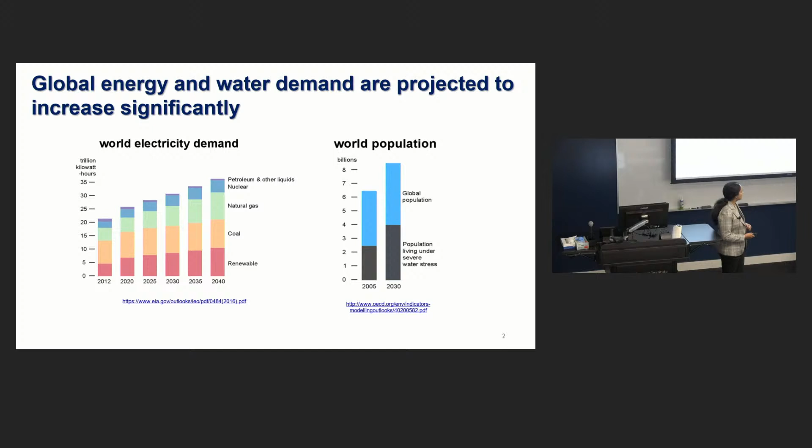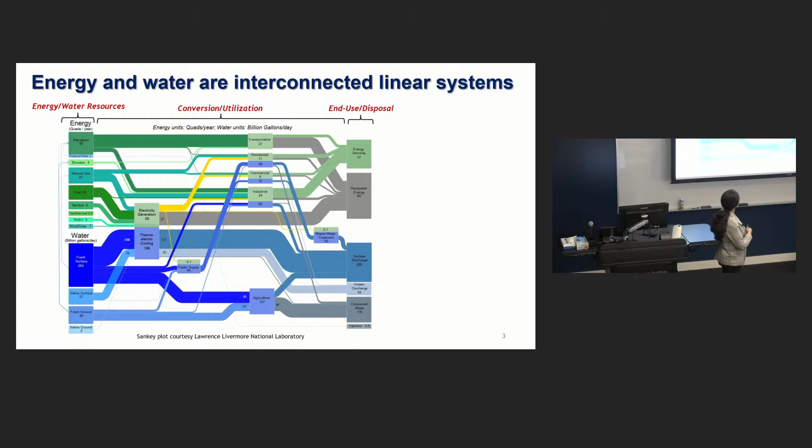And then if we look on the water side, by the end of this decade, so by 2030, we see that about half of the global population is going to be experiencing severe water stress, meaning that we are depleting our naturally occurring freshwater resources, and we really need to think of ways in order to increase our water resources. So this is a Sankey diagram that kind of shows you how water and energy are so closely related and linked. So here we have all the different, I'm gonna walk over here, with our different energy sources, most of which is used for transportation, residential or commercial buildings, as well as for industrial applications and electricity generation.

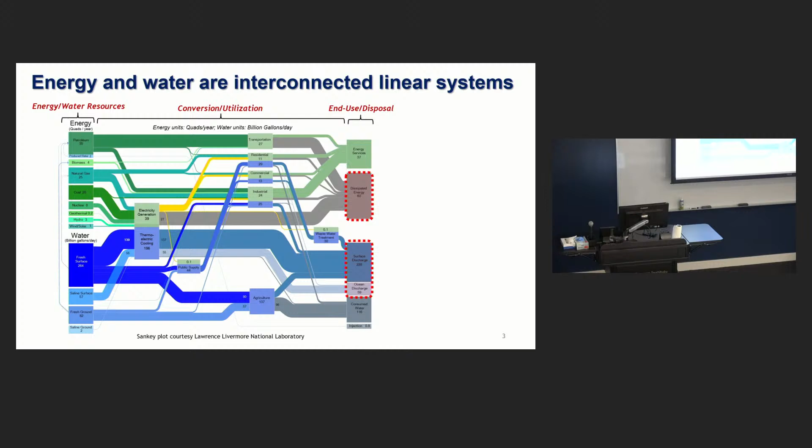And then down here we have all our water sources. So this is our fresh water that's available. And we see that a large amount of our water is used for power generation, so for cooling power plants. And then the rest of it, or a large amount, is used for agriculture. And what I want to draw your attention to, if we follow these lines after it's utilized in these different sectors, what you notice is about 60% of the energy that we started with is just dissipated as waste heat. And about 70% of the water that we started with is just discharged as contaminated water. And so we have this very linear model. And what we're interested in is thinking about ways in which we can recover and reuse both energy and water, and also thinking about ways in which we can decarbonize these energy systems.

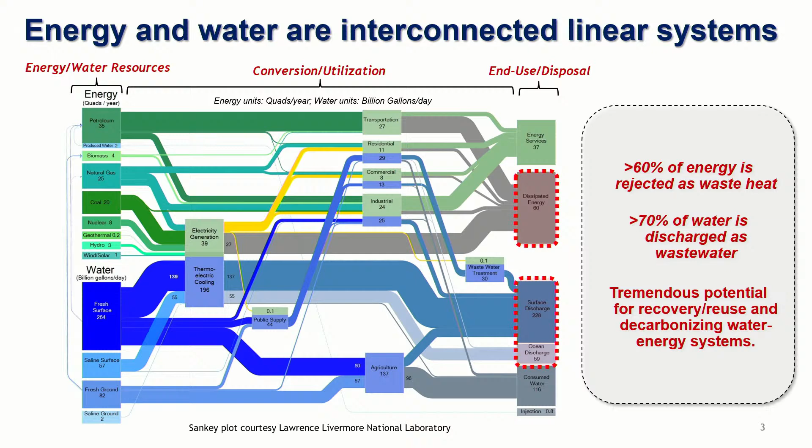And so one thing you may have come across a lot is this water-energy nexus. And all that's telling us is that water and energy are very closely coupled. So for any energy production process, whether it's extracting or refining your fuel, producing power, or cooling your power plant, you require a lot of water for those processes. And on the reverse side, if we look at extracting clean water, energy is required for that extraction, for purification, for distribution, and for wastewater treatment. And so this is really referred to as the energy and water nexus. So any technology that we develop on the energy side should not increase our water footprint, and anything that we do on the water side should not have a significant energy impact.

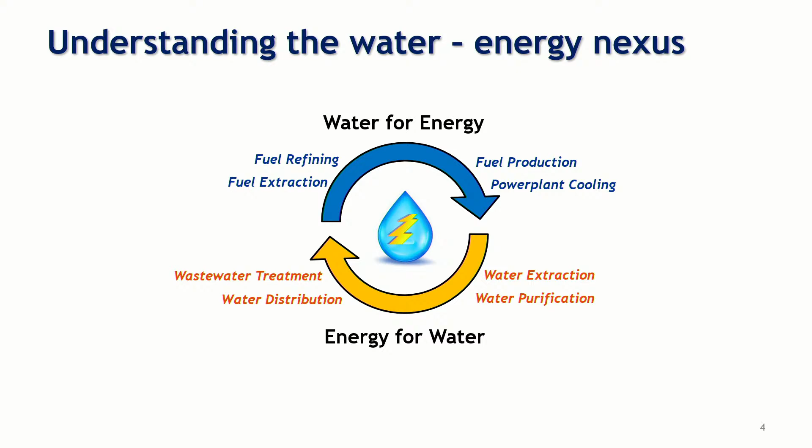And so this is where we can really think about what can materials do for us. And so my lab focuses on two different areas. So on the water side, we look at how can we harness solar energy. So that's an abundant form of energy, but it's not in a form that we could readily use. So how can we harness that solar energy for water treatment? How can we get to zero liquid discharge, where you're extracting all the water and you don't have this brine that you have to dispose?

In that process, you could recover resources. For example, there's a lot of interest now in extracting lithium from these salt brines. So how do you use materials to do that? How can we do surface modification in order to get selective extractions?

And then on the energy side, with the goal of trying to decarbonize our energy use, we're looking at how can we use thermal energy storage. And we're looking at a couple of different applications here. So thermal energy storage for buildings, where you would operate at a temperature of under 100 degrees Celsius.

And then thermal energy storage for industry, where they require temperatures of 1,000 degrees Celsius, for example, for steel manufacturing, where right now it's just fossil fuels being used. So if we really want to electrify industrial applications and buildings, we have to think about adding in thermal storage.

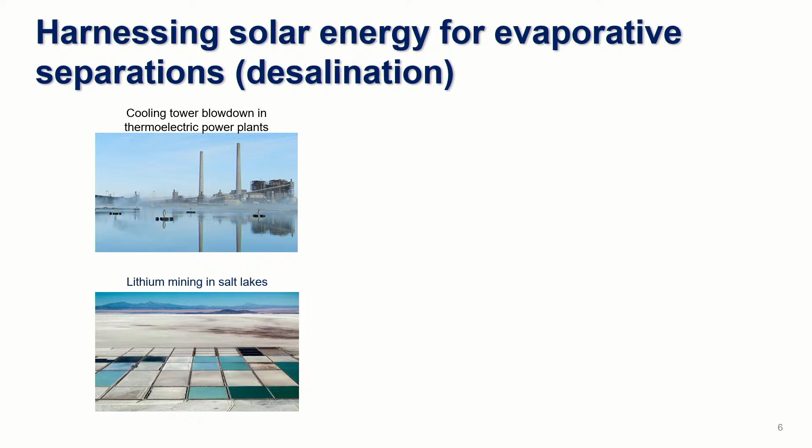You have these large evaporation ponds that are just exposed to natural sunlight, and over time that water evaporates and you're left with salts, or in this case with lithium-containing salts. Now the challenge with just doing this very passive solar evaporation is that when sunlight comes in, it is absorbed by a very large volume of water.

So water volumetrically absorbs sunlight because it's fairly transparent in the visible and the near infrared range. So as a result, your conversion from sunlight to vapor is pretty low. It's only about 20% conversion. So that is extremely low, and because of that, you either need very large land areas to do this kind of passive evaporation, and you also need significantly long times.

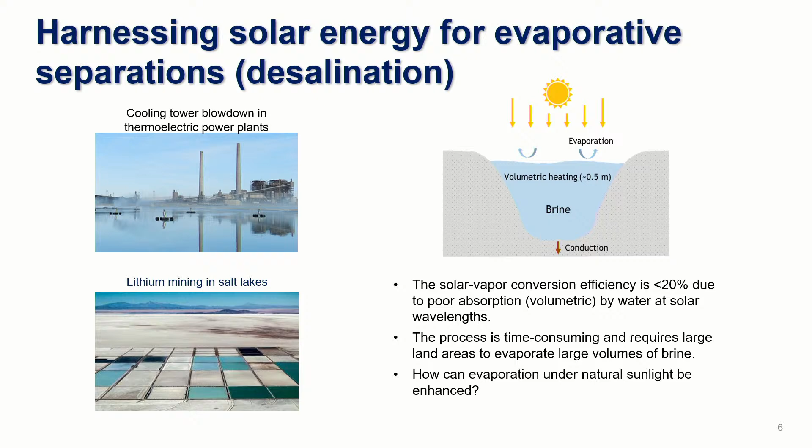So for example, for lithium mining in ponds that are about a meter deep, they have to leave those salt solutions in there for 6 months to a year in order to get all of that water to evaporate. So the question is, how can we really just enhance evaporation under natural sunlight? And again, this is where we can use materials, specifically photothermal materials.

So as the name suggests, you're converting those photons into thermal energy or heat, and you're localizing the heat at the surface, because evaporation is only a surface phenomenon. So if we can localize all the heat at the surface, we'll increase the surface temperatures, and that'll increase our evaporation rates. So what does a typical photothermal converter look like?

It comprises a solar absorber. So this is just a material with a very high solar absorptivity. And then we need some kind of insulating foam-like layer to separate that solar absorber from the bulk liquid, because we want to keep the heat at the surface. And then finally, you have a hydrophilic wick, which is just the material that's going to deliver water from the bottom to that surface.

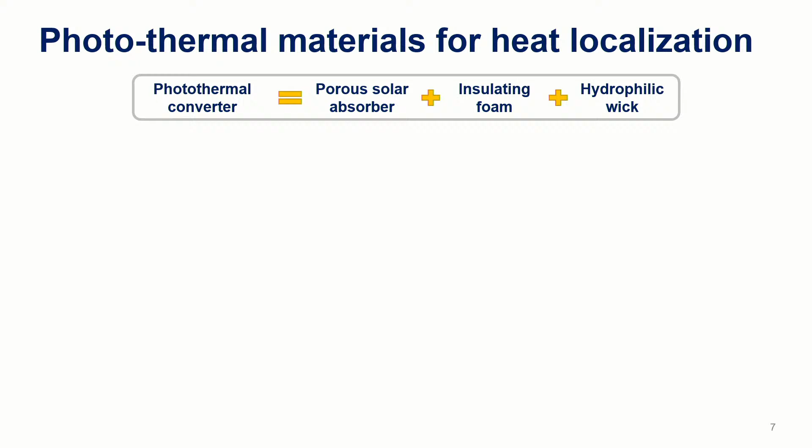So again, the main design criteria for the materials is a very high solar absorptivity. Typically, you want something that's at least about 0.9, and you want a thermal conductivity that's less than 1 watt per meter Kelvin. So a lot of carbon foams can meet those criteria.

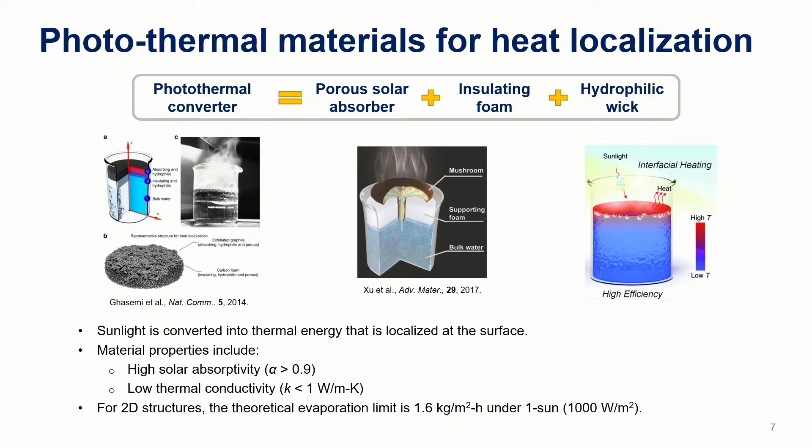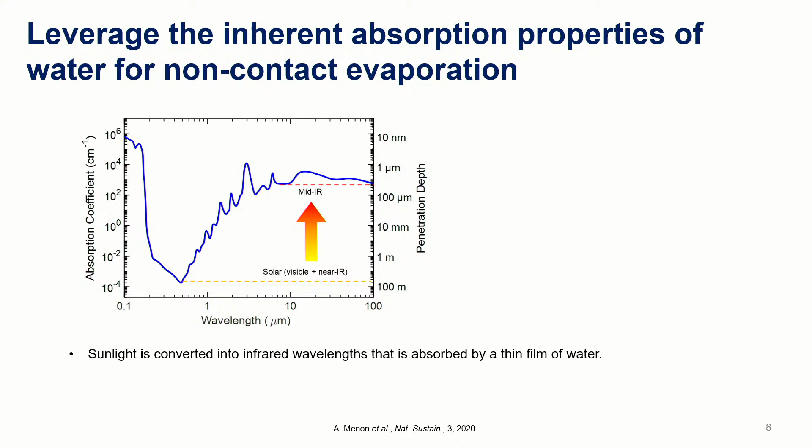So what we do is we convert this visible and near-infrared sunlight into mid-infrared in order to increase the absorption, and now we can rely on just using thermal radiation. So there's no contact between this top layer and the solution we're trying to heat. So we don't need a porous absorber, a wick, or any insulation material.

You just have to have a selective solar absorber and an infrared emitter, and then you're using thermal radiation to transfer that energy to the water surface, and it'll absorb strongly within a few microns. And so you get this surface heating effect, but with a completely non-contact type of system.

So the materials we need to use for that is a selective solar absorber. And so this is a multi-layered material, which again has an alpha or solar absorptivity of about 0.95, and it has a very low thermal emissivity. And so all the sunlight that's coming in is converted into heat by this material. And it is deposited on an aluminum substrate, and we're using a metal so that it can rapidly transfer the heat, so high thermal conductivity.

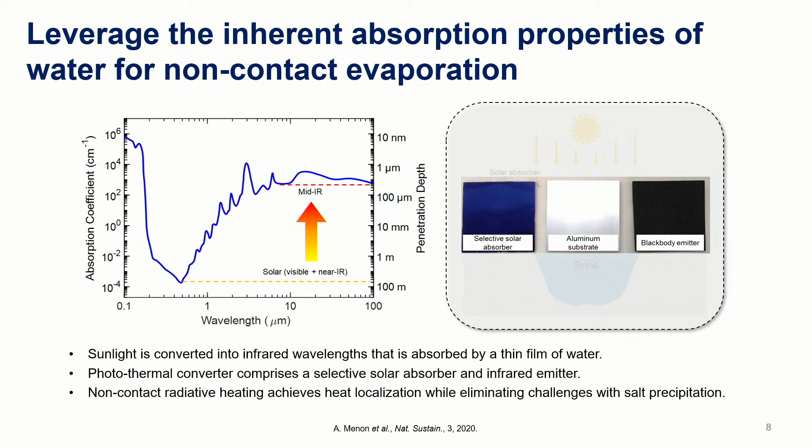And on the back side, we can use this black body emitter, or you could even design selective emitters to emit exactly at the wavelengths where water shows a strong absorption. And so this allows you, again, to do surface heating, and you do not have to worry about any salts precipitating because the entire process is just non-contact. So we're just using thermal radiation to transfer the energy.

And so experimentally what that looks like is if you have this beaker of water and you have your selective absorber and emitter taking in sunlight, the top surface of your water will increase in temperature. Here it increases from around 22 to a little bit over 40 degrees Celsius, while the bottom water, so down here, just remains at that ambient temperature. So you're only heating the surface.

And so if you let this process run for a couple of hours, you can evaporate all the liquid, and then you're left with just the salts that crystallize. And so you can completely remove all the water. And here's just some modeling we did to again show that the heat is really just localized at that surface, and the bottom of the water remains at ambient temperature.

So we can look at a conversion efficiency for this full process. So how much of the solar energy that's coming in is being used to evaporate the water. And we can break down that efficiency into three subparts. So the first one is the efficiency of our absorber. So this is the material that's really taking in the sunlight and converting that into heat. And so here we have a fairly high efficiency because of the optical properties of the selective solar absorber.

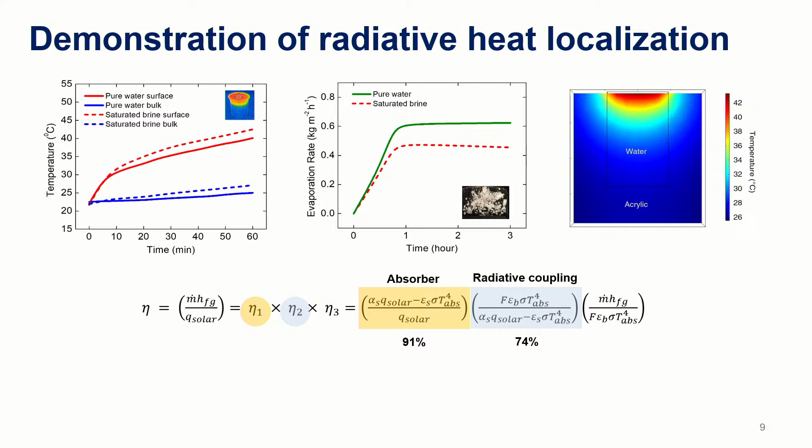Next, that heat has to be transferred from the infrared emitter to the water. And so in this case, because we're just using radiative heat transfer, we need very high view factors. And so you see there's some losses there in the system. And then finally, the heat that reaches the water surface, what percentage of that is used for evaporation versus other thermal losses. And so that's where you see we take a bigger hit.

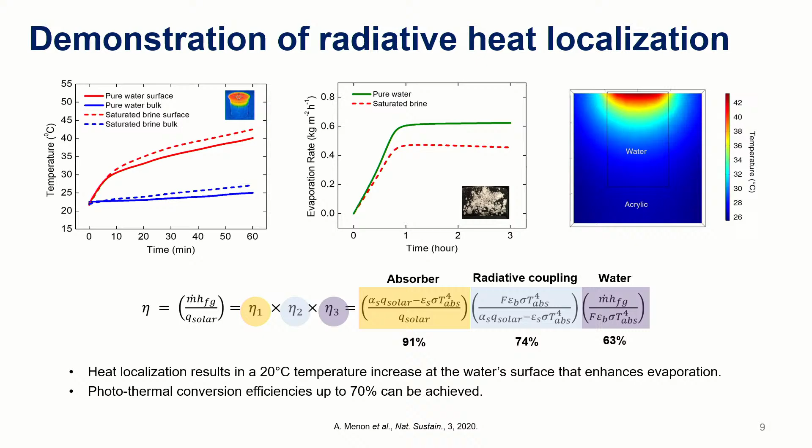But overall, we can get to conversion efficiencies from sunlight to evaporated water of about 70% compared to what I showed you initially for these evaporation ponds where it's only around 20%. And so you can still do a very passive process, but by using the right materials and leveraging the inherent absorption properties of water, we can significantly increase that thermal efficiency.

So we've also looked at, instead of this two-dimensional structure, what if we work with 3D structures? So for example, adding these micro patterns on a 2D surface, or creating a cone, a cuboid, a block, or a cylinder. So in these cases, you can significantly increase your evaporation area because you have all this three-dimensional surface, but your ground area does not change. So you get a much higher projected area, which we call this evaporation area index.

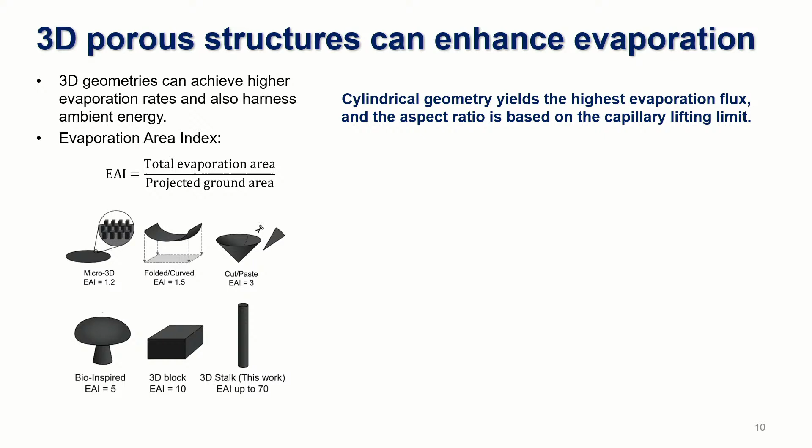And then we looked at what geometry would give us the best performance under sunlight. And so if you have, solar noon is a 0-degree angle, so the sun is vertically above, or at a 45-degree angle. And we looked at which geometry allows you to maintain the highest temperatures for evaporation throughout. And what we see is we can get the highest evaporative fluxes at both the 0 and the 45-degree angles if we use a cylindrical structure among these different ones that we looked at.

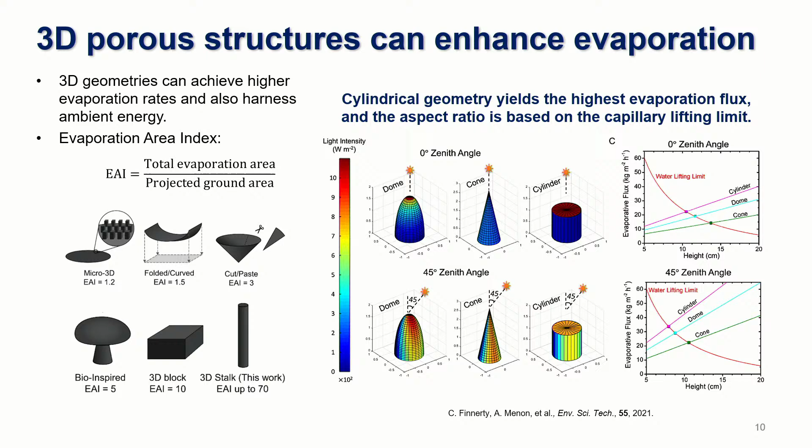And then we can also look at the capillary lifting limit to see how far up the water can be drawn by the natural porous structure, and that'll allow us to define exactly what diameter to height or aspect ratios we want these three-dimensional structures to have. And so we went with a cylindrical structure.

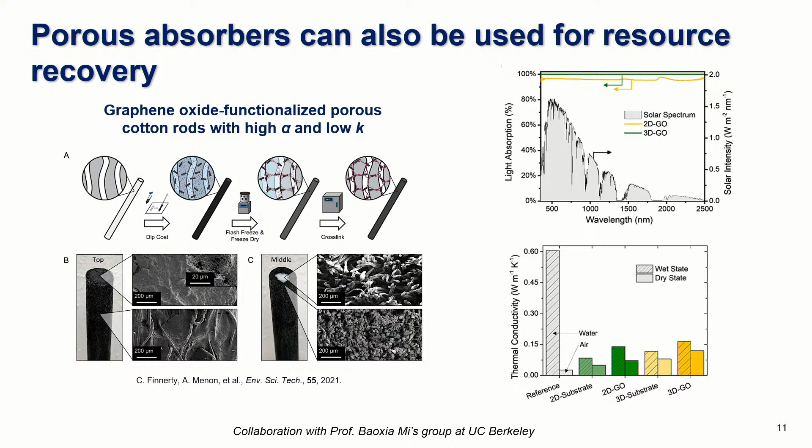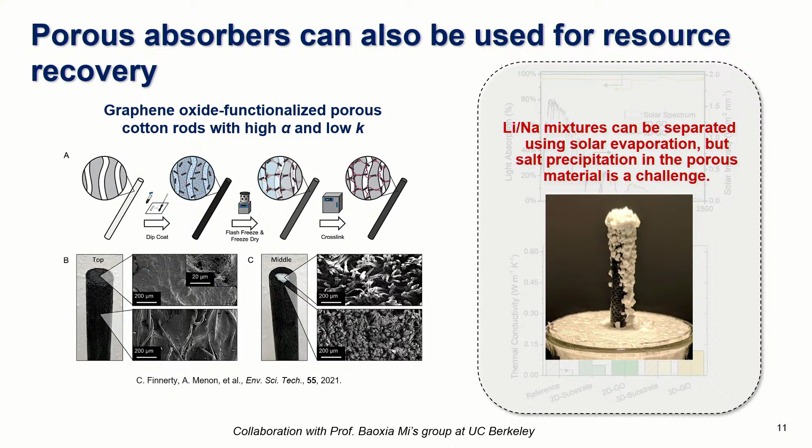So moving on, we're also looking at how do we really handle these situations when you have a lot of salts that precipitate out. Over time, you're basically blocking all of those pores, and you're also losing your solar absorption because you're now covered with these white salts, right? And so we're looking at how can we modify or tune the salt precipitation on different surfaces.

And so specifically what we've seen in the literature is, you can create these types of regular microstructures on your substrate in order to create hydrophobic or superhydrophobic surfaces. And then if you add hierarchical roughness, so now you're adding nanoscale as well as microscale roughness, then you could get not just superhydrophobic behavior, which means that your water really does not wet the surface, but you also get the water to roll off the surface very rapidly, so it doesn't adhere to the surface.

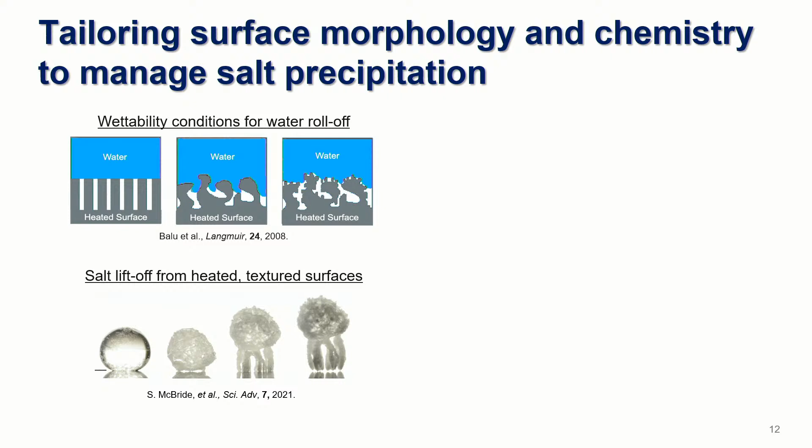And then if we look at salts, there was this paper last year which showed that as your water droplet evaporates and your salts are left behind, if that is happening on a textured surface and under a temperature gradient, your salts can form these legs. So your salt crystals essentially form these legs and eject themselves from these textured surfaces. And so looking at this, we said, okay, how can we modify our surfaces to get the water to roll off so that it's not staying there and evaporating to cause precipitation? And even if there is precipitation, can we get these salts to form the legs and lift off the surface?

And so really we can do this control of the surface morphology as well as the surface chemistry to get the kind of wettability and adhesion behavior that we want. And we're doing this by creating superhydrophobic surfaces. A lot of work has been done on this topic in the past, but the biggest challenge has been that the surfaces are not durable. So after you use them, especially in a salt environment, you see that those surfaces over time lose their superhydrophobic behavior.

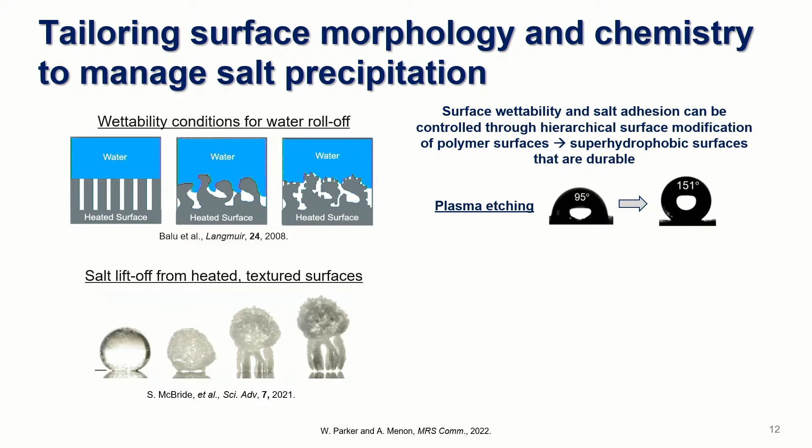And if we do additional measurements on this, you can see that the droplet will actually roll off the surface as soon as we start tilting it. So it shows that it's also a very low adhesion surface, which is very important.

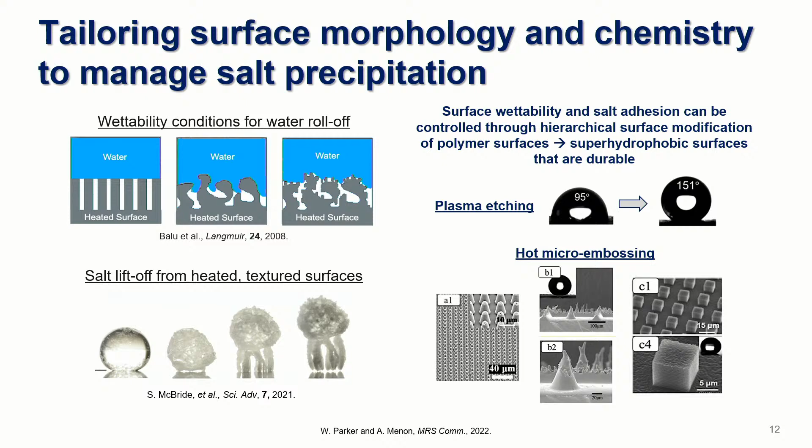all sorts of different patterns, and we can really play around with the spacing and the height in order to give us this desired behavior, which is we want the water to roll off and we want the salt to lift off. And so we're doing some preliminary experiments with the micro-embossed surfaces, and we see that they're very stable under the salt environments and temperatures that we work at, and we're currently characterizing exactly how to optimize these surfaces in order to get very repeatable superhydrophobic behavior. So that would allow us to really control the movement of water and salt on different surfaces as we do desalination.

So most of what I talked about so far has been focused on these evaporative phase transitions, so looking at evaporating the water. But there are other thermal separations that do not require that liquid-vapor phase change, right? And the main reason to look for alternatives is that it's a very, very energy intensive process because of the high latent heat of vaporization that water has. And so we've been looking at alternate techniques. So one is a hybrid membrane and thermal desalination system.

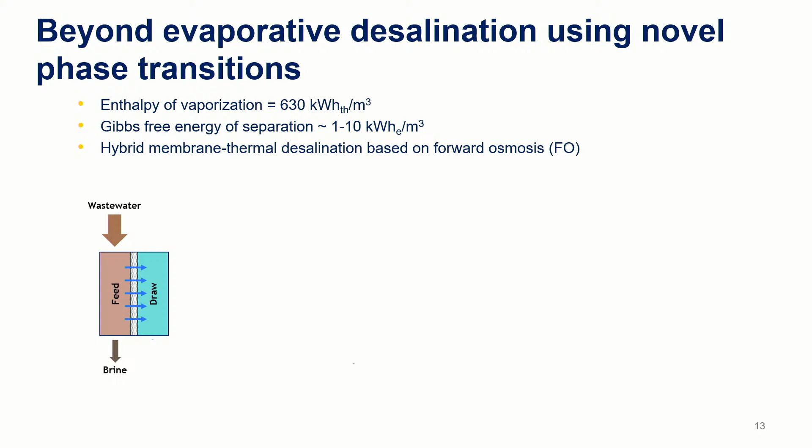So in this you have your salt solution or your feed on one side of a semi-permeable membrane. And on the other side, we have a draw solution. And this draw solution is essentially made out of a material that has a higher concentration than the feed. And so the water is naturally going to flow across the membrane till you have chemical equilibrium. And so once it draws the water till these two sides attain equilibrium, then we're left with this diluted draw solution. So we don't have our clean water yet.

So then we have a thermal separation step where the diluted draw is heated, but it does not have to be heated to temperatures close to boiling. We just have to heat to a critical temperature, which allows the water to separate from the draw, and then you can reuse the draw and you have your fresh water. And so the materials that enable us to do this are thermally responsive ionic liquids. Specifically, these are ionic liquids that exhibit a lower critical solution temperature behavior, or LCST.

So what that means is at room temperature, the ionic liquid and water across all concentrations form a single phase mixture. But as we start heating up, we hit this two-phase boundary, and then at a certain critical temperature, our ionic liquid and water are now immiscible. And so because of density differences, the ionic liquid settles at the bottom while the water layer floats on top. So this is also a thermal separation, but it's purely a liquid-liquid phase transition rather than the liquid-vapor phase transitions we were talking about. And the biggest advantage in this case is that you can have much lower enthalpies for these phase separations compared to the latent heat of vaporization.

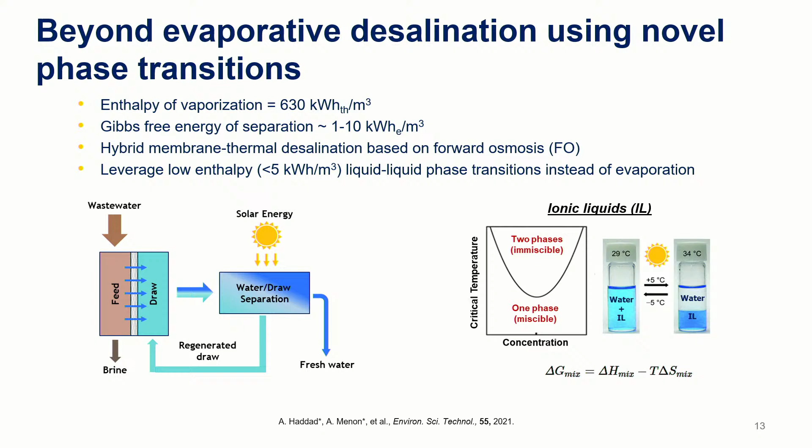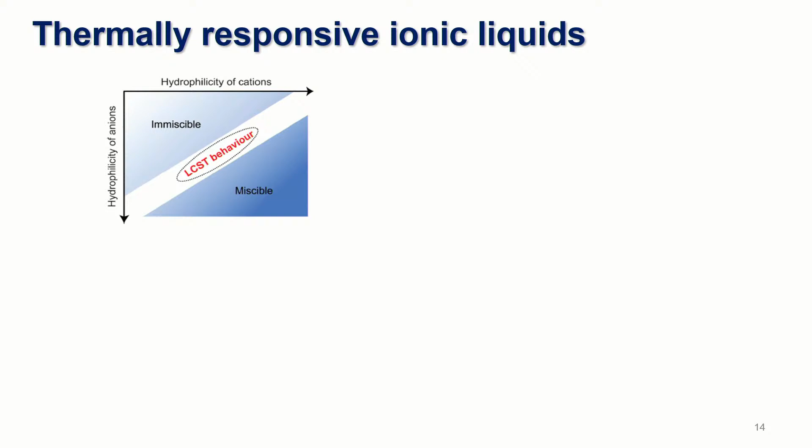And so here, looking at how do you get this LCST behavior. So really it's a combination of the material, the ionic liquid cation, and the anion has to have this balance, very subtle balance in its hydrophobic and hydrophilic characteristics. Because if it's too hydrophilic, you get a very miscible solution. It'll never phase separate. If it's too hydrophobic, it'll always be two phases. And so there is this sweet spot, this region in between, that allows us to increase temperature and create the two phases.

So some of the ionic liquids we work with, again, just organic salts, right? It's a phosphonium dimethyl benzene sulfonate and a trifluoroacetate. There's a few different ones that have been reported in the literature to have this LCST behavior. And the properties we care about are the water activity or the osmotic strength of these mixtures, which varies as a function of concentration. And so depending on what kind of water you're trying to treat, you could vary the concentration of your ionic liquid. And then, of course, the phase diagram itself is really important to characterize. And so we just use cloud point measurements with a UV-Vis spectrometer to generate these phase diagrams.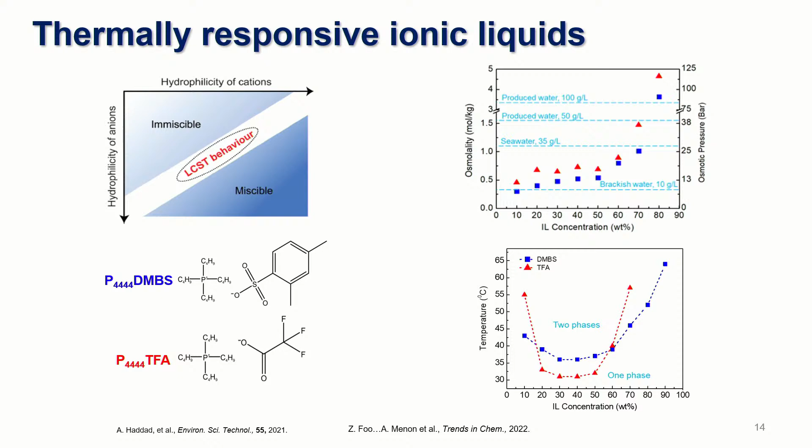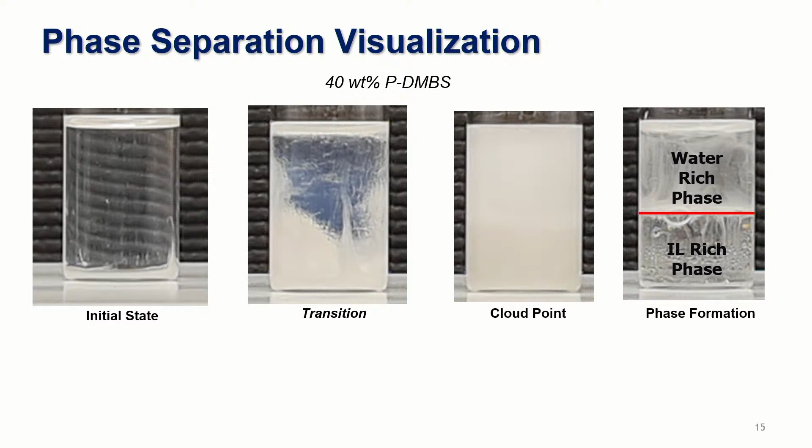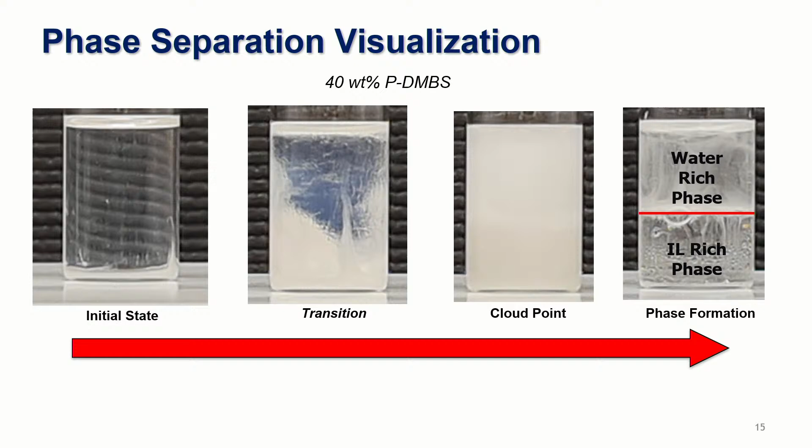So this is what that thermally driven phase separation looks like. So this is the ionic liquid and water mixed at room temperature. And you can see it's a single phase mixture. As we start heating it, it forms almost like a milky solution. And so that's what we call the cloud point temperature. And then finally, after the entire solution is heated up to that critical temperature, we get the two layers to separate. And there is a discernible phase boundary, and the water-rich phase floats on top of the ionic liquid-rich phase. And so temperature enables us to go from this single phase mixture to the two phases.

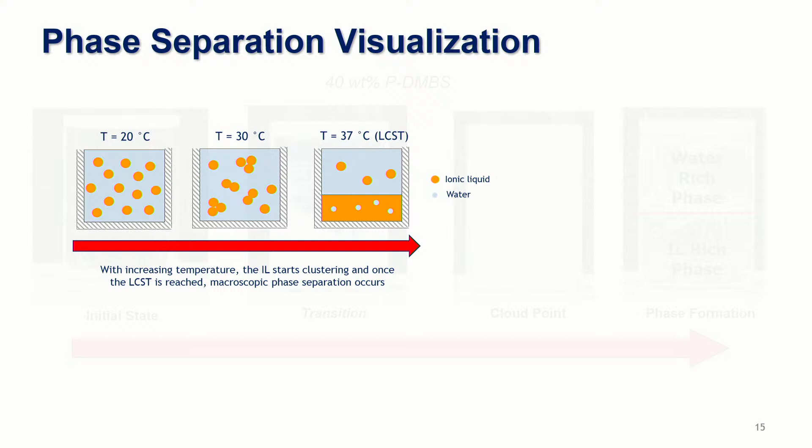And so what we think is happening in the process is, the ionic liquid is dispersed within the water phase. As we increase temperature, the ionic liquid starts clustering. So that's what we're showing here. You form these clusters. And then finally, when you hit that critical temperature, you have created a sufficient number of clusters that allows you to now just form that second phase. And we've seen some evidence of this.

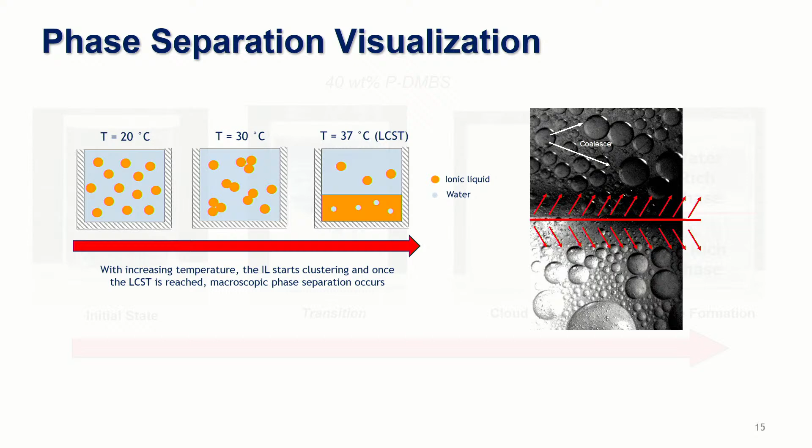So looking under a high-speed camera, we can see the phase boundary, and then we see these droplets of the ionic liquid phase, which are kind of trapped within the water-rich phase, and then we have the same down here. And so ultimately, these droplets or these ionic liquid clusters coalesce and form the second phase. And so we're trying to understand the kinetics of this process and how can we use different external forces in order to speed up that phase transition.

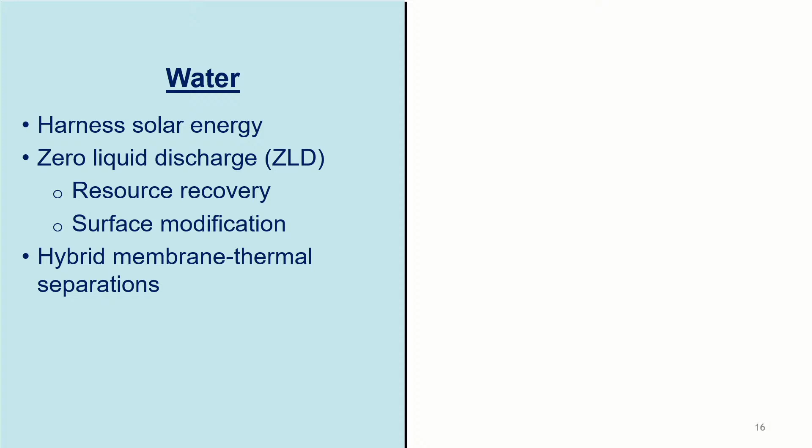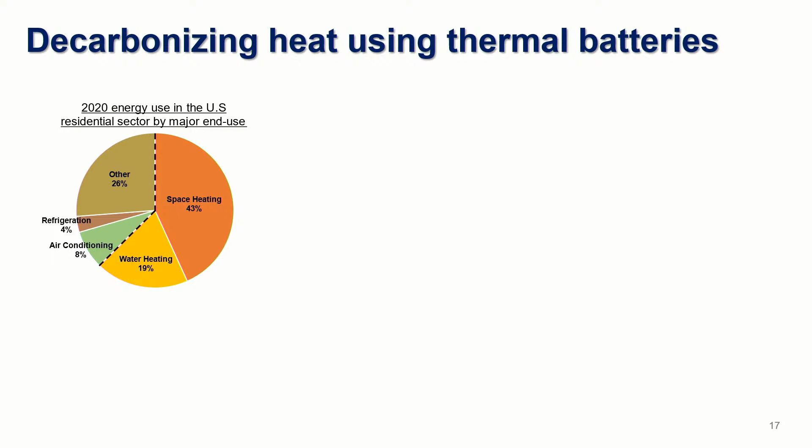So there's a number of ways in which you can do thermal energy storage. There's just sensible heating. So in this case, just the temperature change as well as the specific heat of the material you use. So just storing heat in hot water. Or we could do phase change thermal storage. So now you're storing energy using that latent heat. So for example, just melting ice. But there's also paraffin waxes that can be used for phase change energy storage. What we're focused on is thermochemical reactions, where now energy is stored in the heat of reaction itself.

And so one example is these salt hydrates. So these are salts with a certain number of moles of water attached to them, and they can reversibly release the water and reabsorb the water in the crystal structure itself. And the reason why we're interested in that energy storage is just because of the amount of energy that we could store and the volume required for that storage. So for a building application, because space is really important, we want a compact solution, and you can see that we need only about 2 cubic meters of the thermochemical material to store the same amount of energy as these other energy storage cases.

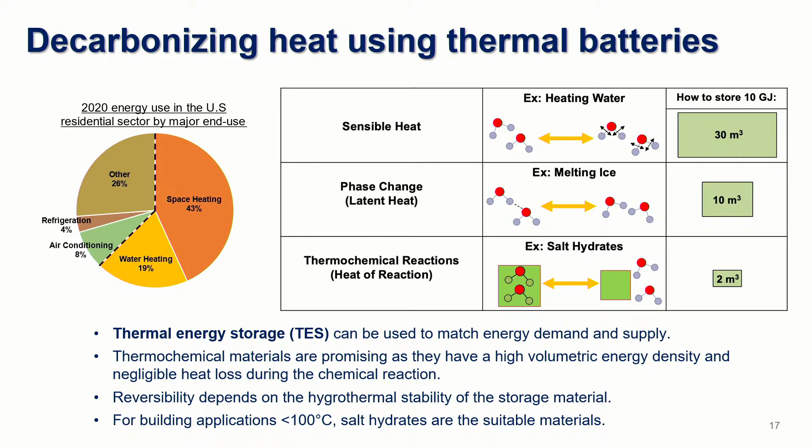So how does it work? So we have our salt hydrate, and if we apply heat, we start dehydrating the material. So that is an endothermic reaction, supplying energy, and we're charging our thermal battery in that process, and we release water molecules. So you get a dehydrated version of the salt. And then when we want to release that energy, we just run the reverse reaction where we introduce water molecules, so in the form of relative humidity, and that creates an exothermic chemical reaction where the salt is hydrating again, and that process allows you to discharge the heat that is stored.

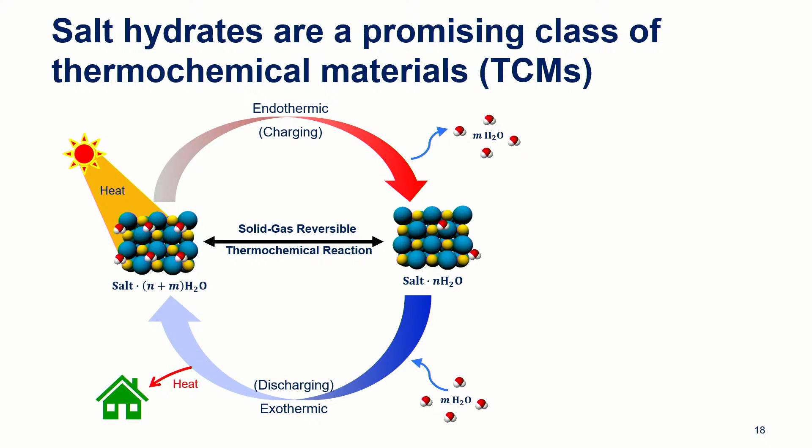And we would discharge this heat for a building application. And so we're looking at designing a packed bed reactor with these thermochemical salt hydrates in order to charge and discharge energy as heat. So this is thermal energy storage at temperatures under 100 degrees Celsius for buildings.

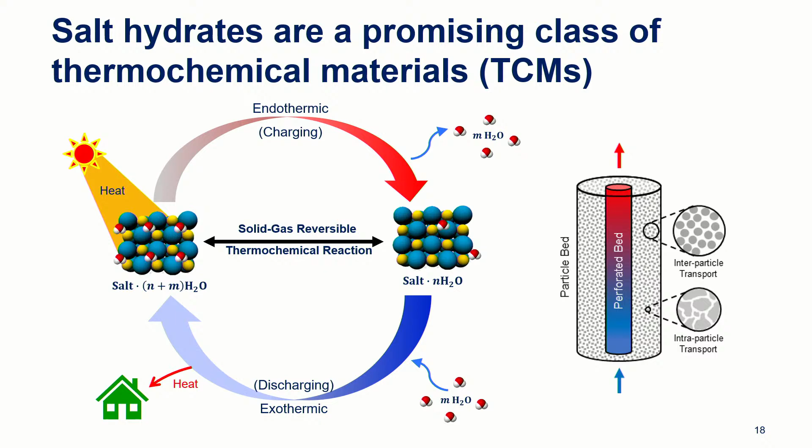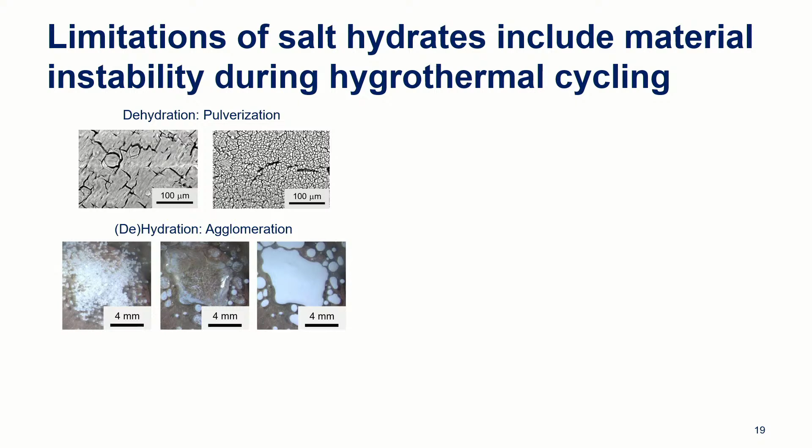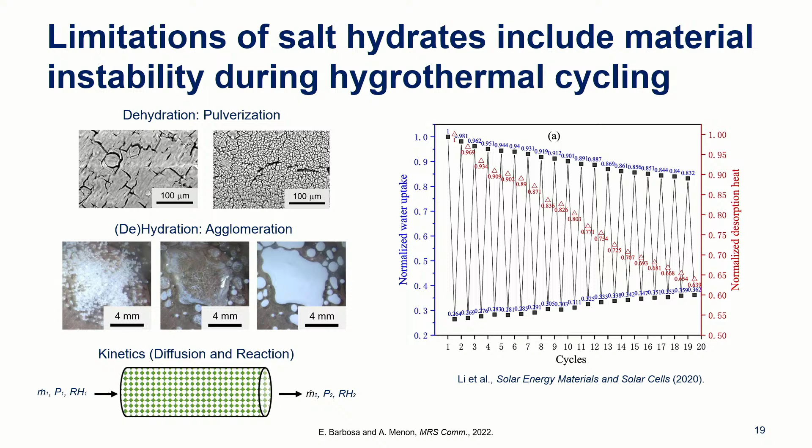So it starts up over here, but as we cycle the material, even just 20 times, that energy density drops to 60%. And so that is because of these instabilities or irreversibilities in the chemical reaction itself. And as a result, your reaction is also going to become a lot slower. So the kinetics are going to be slower because you have all of these non-ideal states.

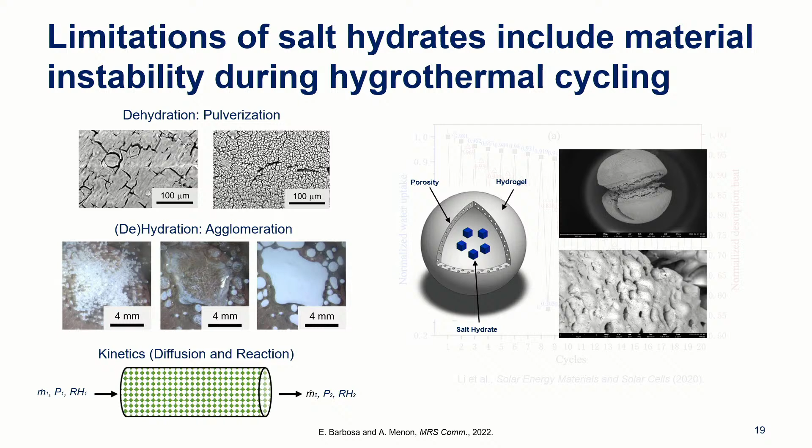So one of the things we're looking at is trying to stabilize the salt hydrates. And so we're making organic and inorganic composites. So here's the salt, the inorganic material, and then we encapsulate the salt within a hydrogel network, which is still highly porous. And so these are SEM images of some of the initial syntheses we've done. So this is now the encapsulated salt, and the structure is still porous to allow you to do your heat and mass transport, but the salt is held in place so that it cannot just leak out or pulverize. So we've seen some improved performance in terms of cycling using these matrices.

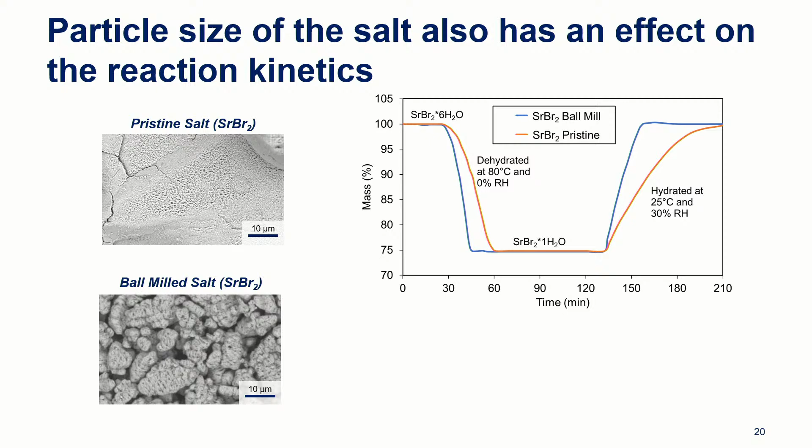And the particle size also has an effect. So working with the larger particles versus ball milling it to get these smaller particles that are about 10 microns in diameter, we can see when we do TGA that the ball milled salt dehydrates quicker and hydrates much quicker than the pristine salt. And as a result of that, the energy densities from the ball milled salts tend to be a lot higher than the pristine salt.

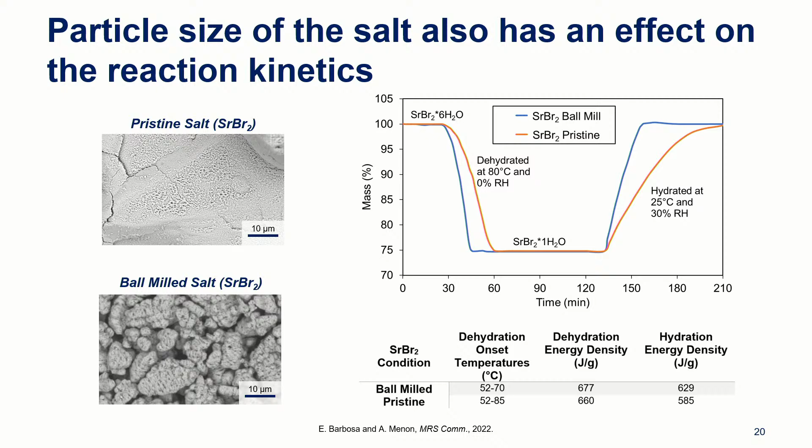And then I'll very quickly talk about some work that we're doing in collaboration with Boston University, looking at very high temperature thermal energy storage. So this is for temperatures close to 1,000 degrees Celsius. This is mainly to decarbonize industrial processes like steel making and cement manufacturing, where they require these high temperatures. So when we talk about 1,000 degrees Celsius, there's really only a few materials that we have as options. And so they're either ceramics or it's graphite. Those are pretty much the only materials.

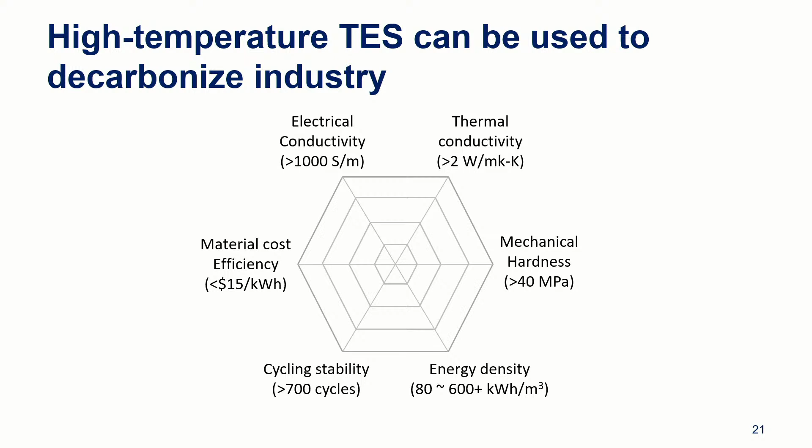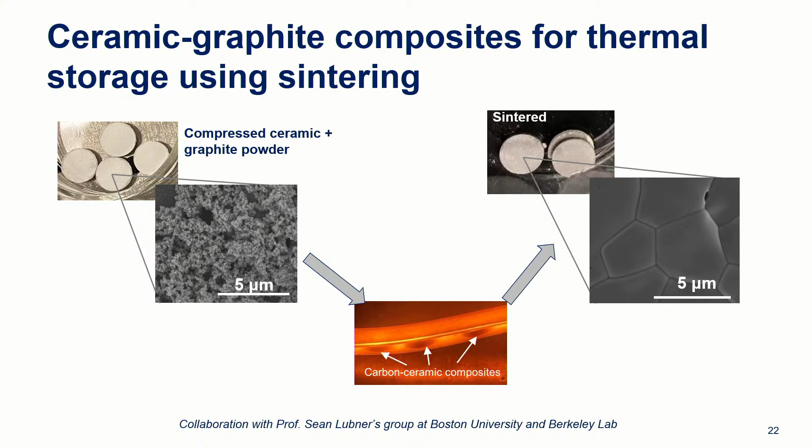And so the idea is to use this for high temperature thermal storage over 1,000 degrees Celsius, and we're looking at a few different ceramics to give us all of these different properties that we need. The presence of graphite allows you to make these ceramics electrically and thermally conducting, and so that's the idea behind using composite materials.

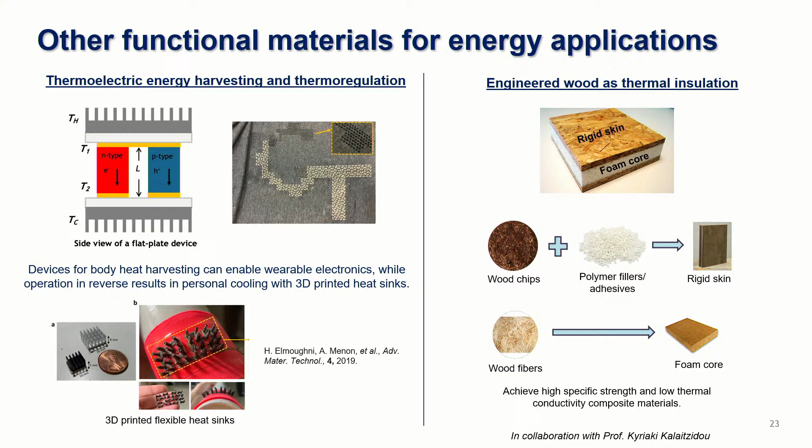So I'll just leave this slide up there for some of the other things that we're doing related to energy. So thermoelectric energy harvesting, like wearable and flexible electronics, primarily functional textiles. And then we're also looking at developing thermal insulation and building materials just based on wood and natural fibers so that they could sequester carbon. So with that, I just want to talk about the fact that previous systems are these large-scale static systems, but with materials we could really try to get to very different types of systems.